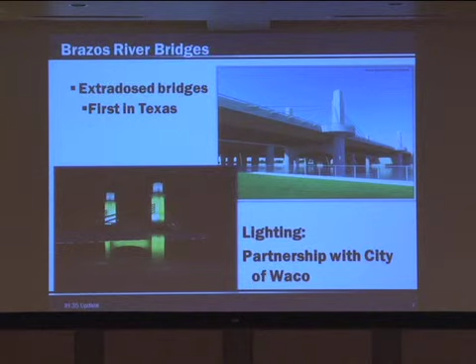And then also just some of the aesthetics that we wanted. This is the city of Waco, and Baylor really wanted a signature bridge in this area. So some of the aesthetic things, the lighting, is very unique also to accent this bridge.

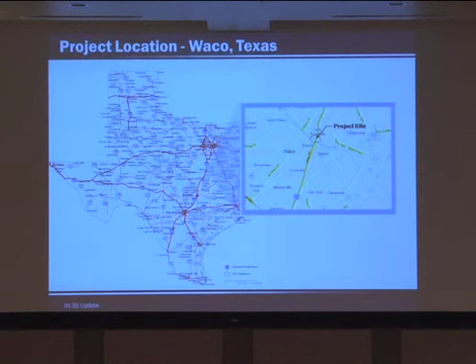But just like all of us, we have to start in a location. Our project site is right there, right over the Brazos River Bridge near downtown Waco. As you can see here, the location had discontinuous frontage roads, U-turns at the river, and so needed to connect those frontage roads. This location is very unique in that it's a very busy river area.

As you can see in the picture on the right, the new McLane Stadium is starting construction. That was in our northeast corner. On the northwest corner we have the Oncor substation and a restaurant, Buzzard Billy's.

The southwest corner has Baylor Robinson Tower, with a lot of pedestrian traffic, students coming back and forth there. On the southeast corner we have the Texas Ranger Museum, an active Texas Ranger outfit, and a visitor center.

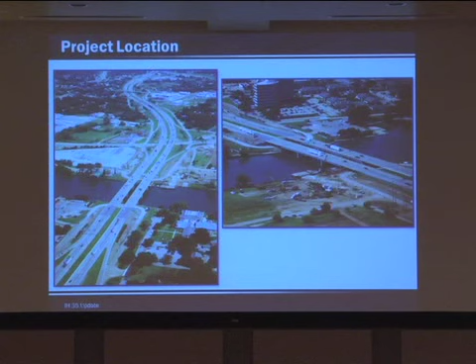Just like in our careers, it takes a lot of communication and people working together to implement projects well. There was a lot of coordination between us to get this done. Just like all of us, we need to have things that have come before us and things that come after us.

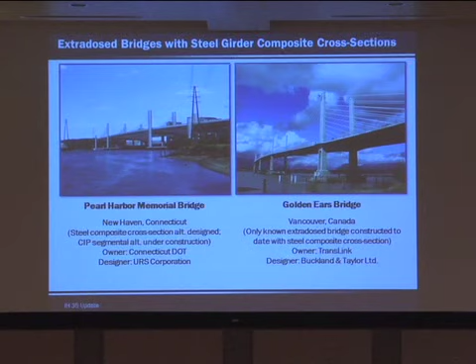A similar steel girder composite extradosed bridge was built recently in Vancouver, Canada, the Golden Ears Bridge. The Pearl Harbor Memorial Bridge in New Haven, Connecticut is currently under construction.

An extradosed bridge is basically a combination bridge, a combination between a girder bridge and a suspension or cable-stayed bridge. A girder bridge is what we're most familiar with - the girders span the river or roadway we're crossing and support all the load. In a suspension bridge, the cables basically bear the vertical load. An extradosed bridge has both the cables and girders carrying the load - the load is shared, and the stays act more like pulling the girder together and strengthening those girders.

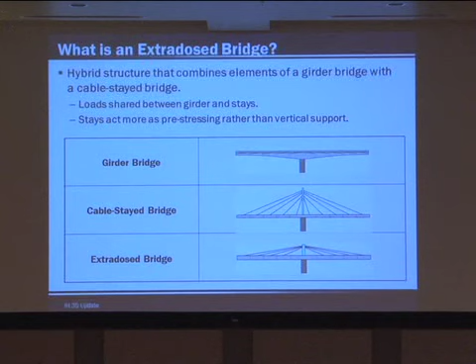This bridge was chosen as a signature bridge for Waco, and the reason they chose this aesthetic is that there's a suspension bridge, actually a pedestrian bridge that used to be a vehicular bridge, in Waco. So in order to cooperate with the community, Bridge Division and AECOM came up with the idea of the extradosed design to give that cabled look, but because of the width of the river being shorter, not a big span, we couldn't do a true suspension bridge.

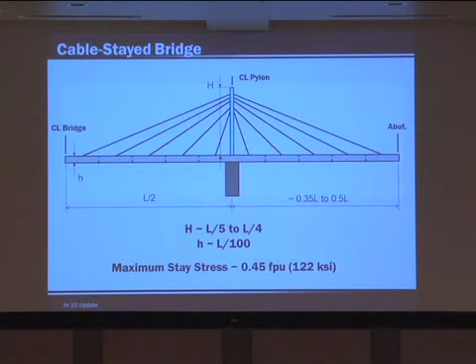You see here a true cable-stay bridge and suspension bridge have a very high pylon in comparison to the length of the bridge, and the girders are very shallow in comparison to the length of the bridge. As opposed to the extradosed bridge, which has a much shorter pylon and a much deeper girder to carry the load.

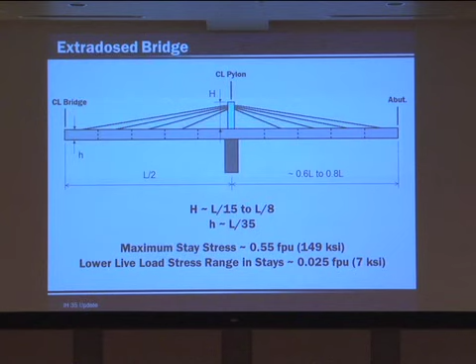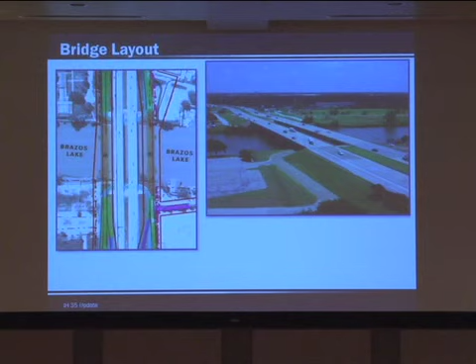This bridge is 56.5 feet wide. It was northbound and southbound frontage road bridges, 56.5 feet wide, 620 feet long. From pylon to pylon is 250 feet, and then from the abutment to the pylons it's about 3/4 of that length, 185 feet.

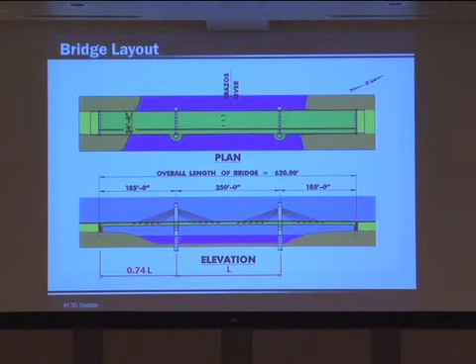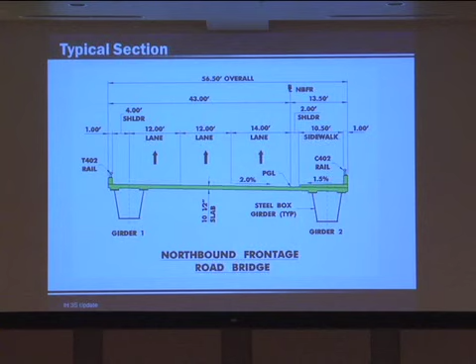Just like our careers, we all need a good foundation, and so the first step in building this bridge was our drill shafts. These are actually there in the river - you can see the pictures of them drilling the river with their rebar cages ready to go. These are 10-foot diameter drill shafts to support the bridge.

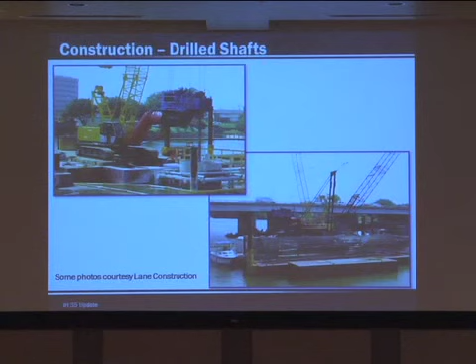After we got our drill shafts - this is actually where I came onto the project timeline-wise. The previous project manager, Jacob Bell, did a great job getting this project going and started, then took another job, and I came on about the time the footings were being done. These footings are basically right below the water level and transfer the load from our 9x9 pylons to our 10-foot drill shafts. This was actually my first time doing a bridge in the water.

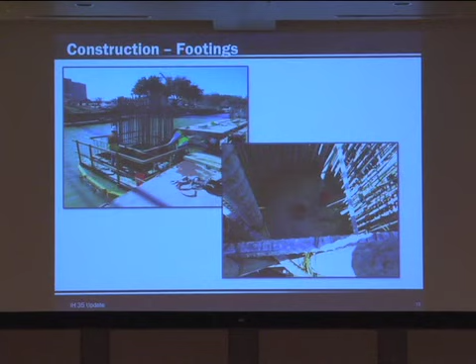I came on right as they were doing this - we had our form set in the water. Unfortunately we had a bit of a leaking problem, so coordinating with the contractor, we came up with some methods to pour this underwater, even though it was supposed to be a dry pour. We got with Bridge Division, an invaluable resource, to see how we could do that, along with ideas from the contractor.

We forced the water away, starting in one corner and pushing it into pumps away from the concrete. And just like in life, a lot of times we're faced with some difficulties. Things don't always go exactly as we had planned.

So the first footing pour, I'm out there with a brand new engineer, and we're going through some learning curve as a contractor. It's important in our careers to have a higher power you can rely on. I remember being out there on the footing pour, watching to make sure the water didn't mix too much with the concrete. It started getting to where I was questioning it, and I really prayed there would be a clear sign whether or not to cut off the pour.

And actually, our pumps went down completely and the water mixed in, so it became very clear. But we learned a lot of lessons, and I think in life and in our careers, when something goes wrong, we learn from those mistakes.

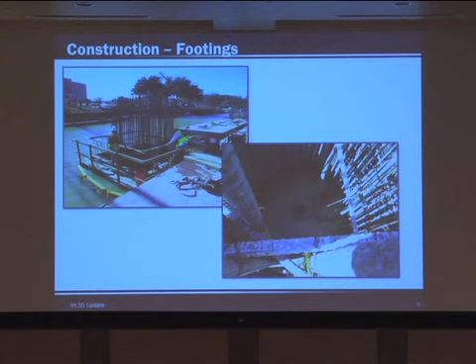The contractor did a great job coming up with different ideas. They brought in different pumps and buckets with holes put in the bottom to prevent things from getting up into the tube. They also got divers out there to seal it better. We still had to deal with the water, but had success pouring those footings, and as each footing came we got better and better, eventually doing some with very little or no water coming in.

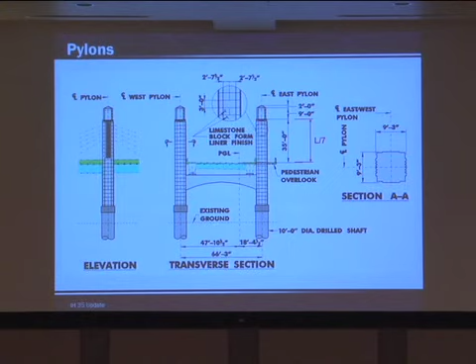After we got through with our foundation, the pylons were the next step. You see here the 9x9 shape with the aesthetic features on the right side. These pylons are about 1/7 of the length of the bridge, or of the cables.

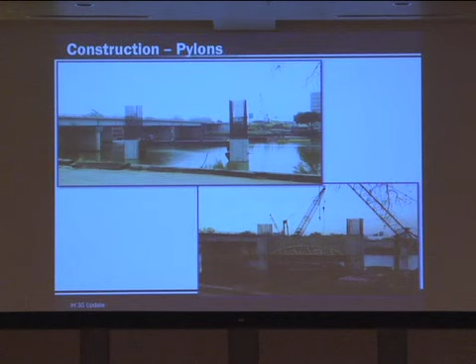Here's just a couple pictures of the pylons being constructed. Obviously this construction is much easier once you get out of the water — it's pretty simple, you get your forms and everything, it's a lot more straightforward. Just the abutment there being built more on the pylons.

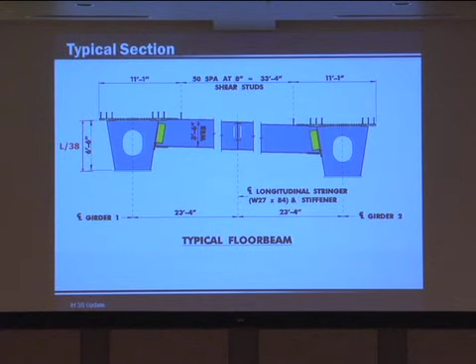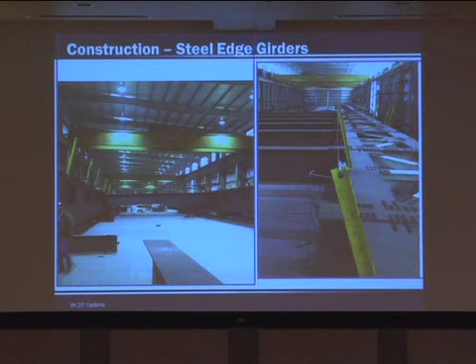After that came the girders and the floor beams. This is our typical section for our girders, with the depth of the girder here about 1/38 of the length. Here's pictures of them being fabricated at Hirschfeld Industries, and another picture of that.

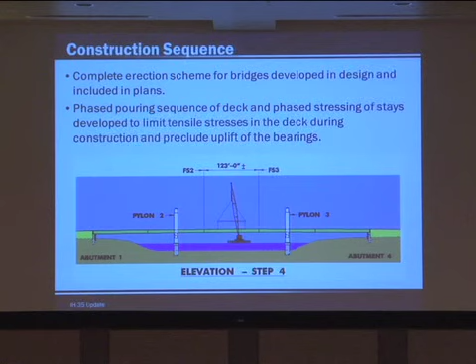Just like in our careers, another lesson we all need to know is that we have to have a plan — planned in this case from abutment 1 to abutment 4. AECOM did a great job detailing that out in the plans, and Lane did a great job taking that, putting it together how they wanted, and submitting it back to AECOM. Basically, we have shoring towers set from the abutment to the shoring tower, from the shoring tower to the pylon, and then coming from the other way and setting it in the middle.

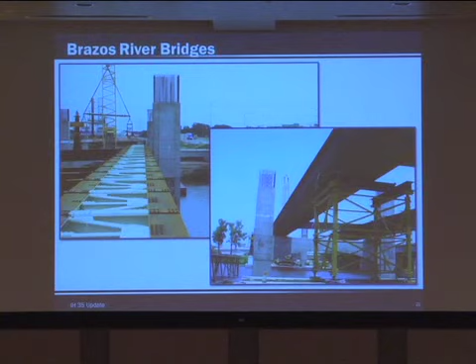So you can see here, setting the girders on our shoring towers. Another great lesson: we had to meet in the middle. We set the last piece there in the middle and had to make sure it all fit together well.

Set that in there, and then the next step is the actual stays. The anchors are connected to the girder on one end, and then we have a saddle that they go through to provide that additional support. You see some of the loading there on the anchor system.

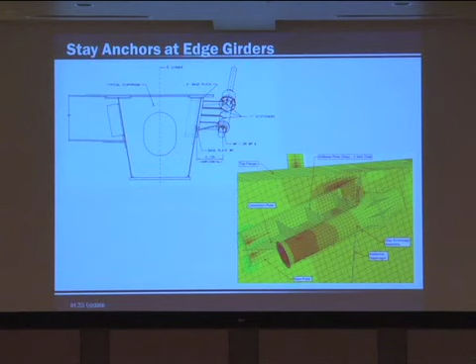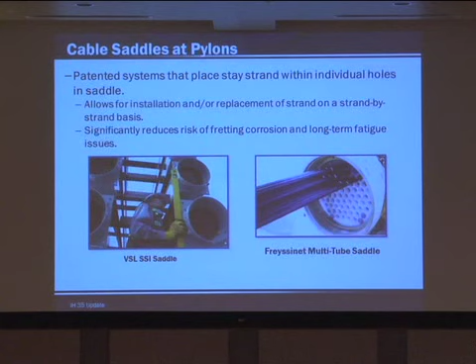There's what the anchors look like — they were connected, bolted onto the girders. Then the saddles were formed in the pylons. This was actually a patented system where each of the strands could be individually installed or replaced, which helped reduce corrosion and fatigue, and also allows for future maintenance by replacing strands if necessary. Here are our saddles, produced by Freyssinet.

These saddles were actually set on the ground in the rebar cages, staged there, and then lifted on top of the pylons. You can see over there on the left one of the rebar cages with the saddles in it.

It was very important that we got those saddles at the very exact directions, both in the X, Y, and Z, rotationally, because those cables had to pull a very particular way. So there was coordination between Freyssinet and Lane as they did the deck pours and everything.

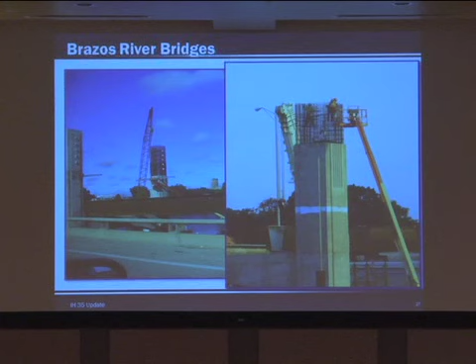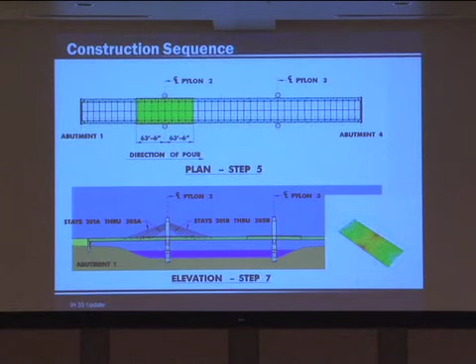Here's the form up there ready to pour on the saddles. And then we had a very particular construction sequence. In order to stress the cables and pour the deck at the same time, it was a very particular process. We poured first at the pylons, stressed cables, continued to pour, stressed cables again, finished our pour and stressed the cables, then tested those cables and came back and restressed a couple of them to make sure they met the models.

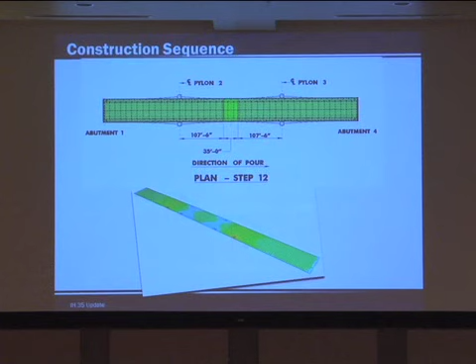You see here the pictures of the deck pours there at the pylons. Then our stay cables—there was a single plane of 5 cables at each pylon, and all those stays consisted of 12, 0.62-inch diameter strands to support that.

Another lesson learned: if you think of yourself as the girder, you're going to need people around you that are going to support you, that are going to help you through your career. I've been fortunate enough to get a lot of that help and guidance and support.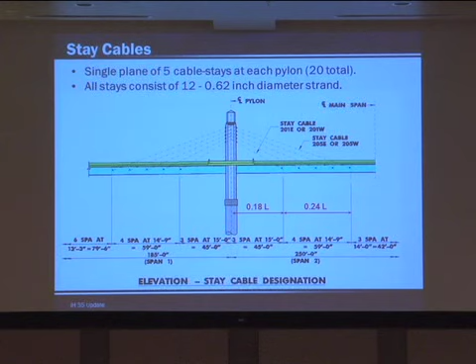From the pylon to the first set of cables there is about 0.18 of the length of the bridge. And the total distance between the first and the last stay cable is 1/4 of the length of the bridge. You can see here the cable stays being constructed.

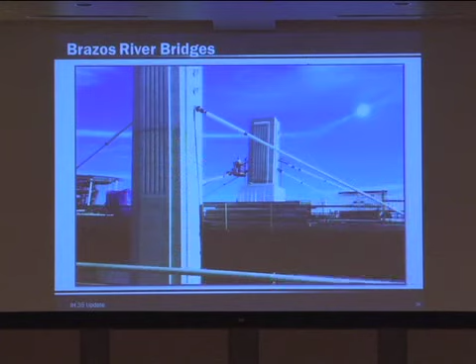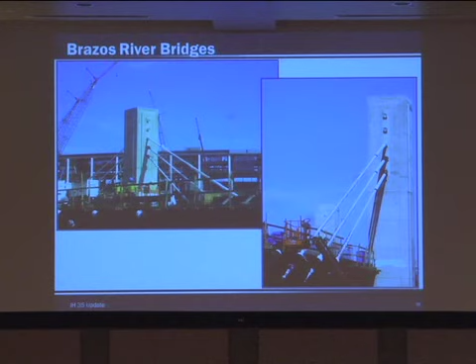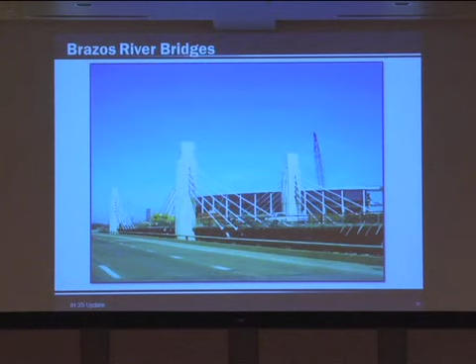They just kept going, continuing to do those, in a very particular process, stressing them. They installed them all, then were stressing and pouring, putting them on and getting them placed. They're not all totally straight in line—there's a bit of a fan due to the way they had to attach to the anchors there.

Right now, where we're at, we have it totally open for traffic. We still have some lighting and some aesthetic things left to do.

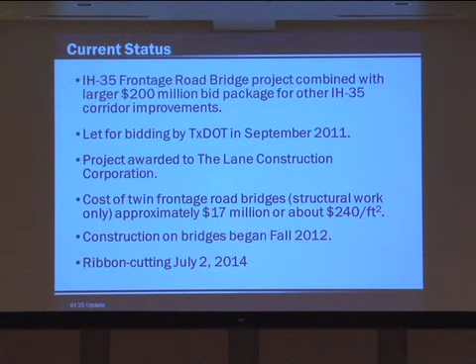This bridge was actually part of a larger contract that we let in September of 2011, and construction on the bridge began in fall of 2012. We opened the bridge 2 months earlier than anticipated—we had some incentives in there. We change-ordered those incentives because of McLane Stadium coming and when their first game was going to be. So in order to make that happen, we added that, and Lane, our contractor, did a great job of meeting those deadlines and getting that roadway opened in time for that first game.

Here you can see in the background, McLane Stadium, and a picture of the bridge and the stadium together there on game day, fully open for traffic. You can see we're still working on some of the sidewalks below, and we still have our lighting to go.

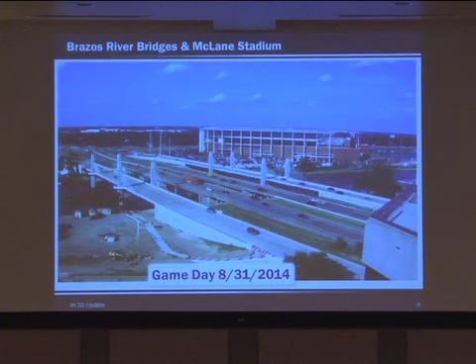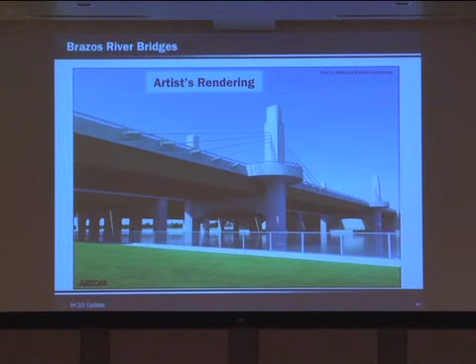In our careers, I think it's important that as we do projects, we think about where we were and where we wanted to be, and go back and check and see. Jody, our PIO from Waco, did a great job of putting this slide together showing what we intended it to look like, and then transitioning into what it turned out to be. It was a successful project where we got to where we were trying to go.

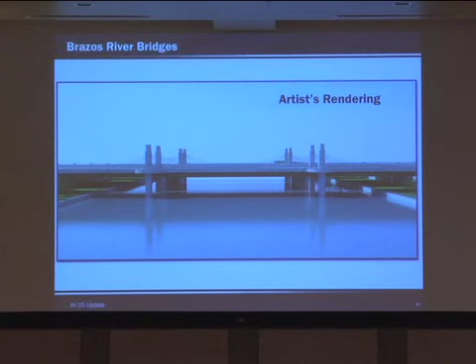A chance to look at that from a different angle. We put the stadium in the background on this one so that it wouldn't dwarf our bridge here. You can see, very similar to where we were trying to get.

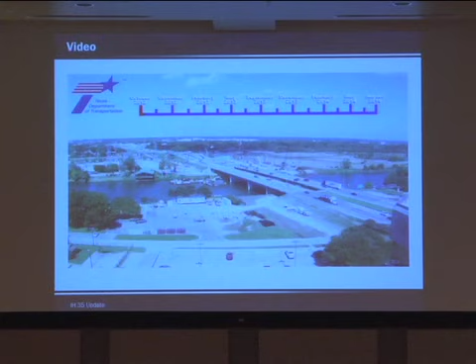And then it's nice to take a minute after a successful project and sit back and enjoy that project.

I have a time-lapse video here. Unfortunately, the embedded file in the PowerPoint wasn't working very well, so we'll watch it on this MP4 instead—it'll flow better. You can see there our pylons and our footings going in on both sides of the river, coming up, continuing with our pylons.

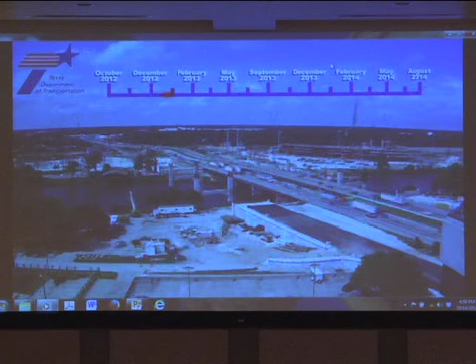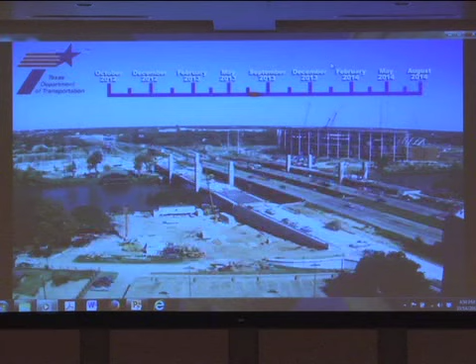We should be having our girders coming in here on the southbound side and now the northbound side. We've got our floor beams going in, construction going. And here we'll start deck pours over there on the northbound bridge, pouring at the pylons. The cables will start going in on the northbound bridge, pouring going on the southbound bridge at the pylons. The cables going in there, tensioning.

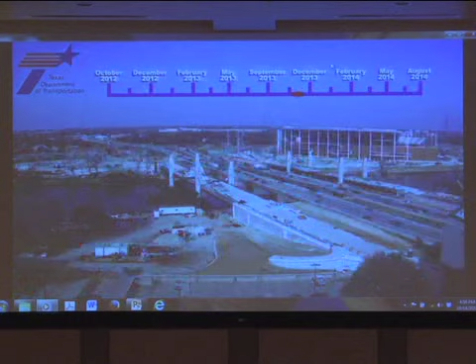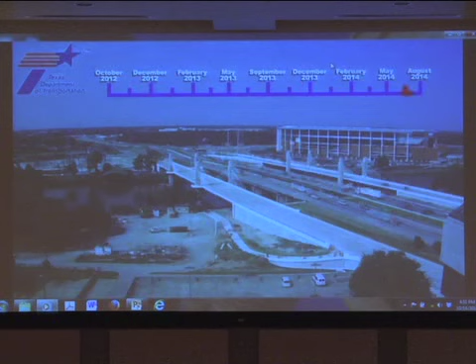Continuing the construction sequence to pour the rest of the deck. And you see here we open traffic. We have them push from side to side as we do some rail work and some sidewalk work. As the project progresses, we're moving them back and forth. But near the end of May, early June, we're starting to get it completely open. Traffic is flowing across there, ready for game day. So a successful project for the community to get that ready and in time.

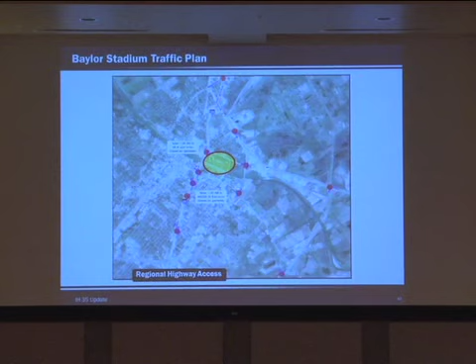Sometimes after you've had a chance to sit back and relax, you need to evaluate how well it worked. So, in coordination with the City of Waco and Baylor, plans were put together on how to handle not only the vehicular traffic but the pedestrian traffic coming to the stadium site. Plans were put together on what we had available for coming there. You can see our main routes coming in: I-35, Business 77 or LaSalle, and Highway 6.

We actually had a project right in front of the stadium, which we converted MLK into Loop 574 to provide additional access there in front of the stadium. Lane Construction also did that and got it done in time for the stadium to be open.

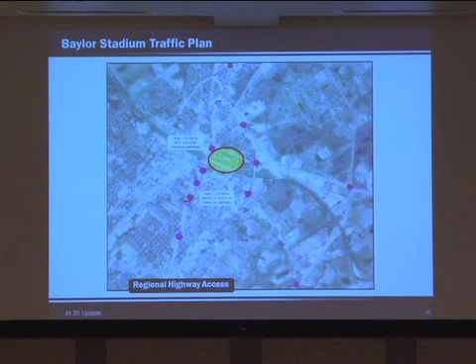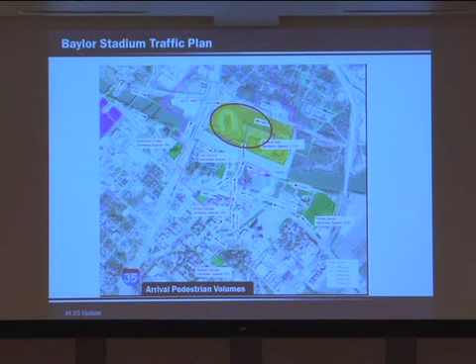You see here very high volumes anticipated for the pedestrians. Working with Baylor through this whole project, we had coordination meetings between ourselves and Baylor on the stadium, on when we were going to have lanes closed, when they needed to get in and out, and everything worked out well. But there was just a large volume of pedestrian traffic coming and leaving the stadium, and planning for that. Our traffic volumes, I know they're hard to see here, but there were large traffic volumes coming in on each of the different routes.

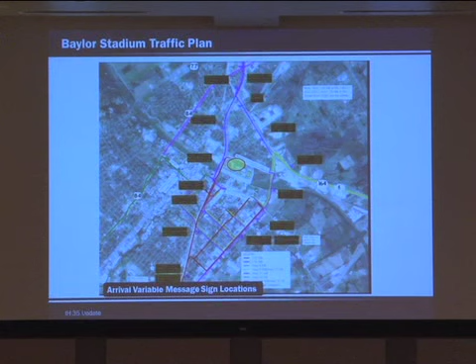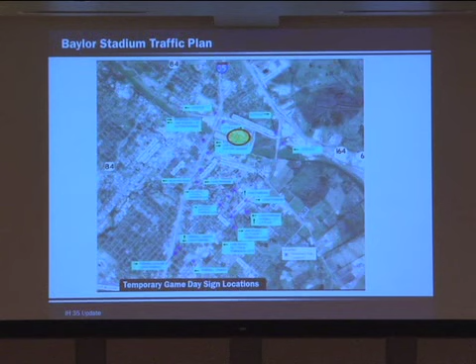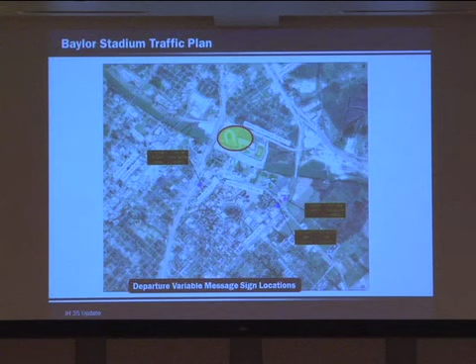Then there's getting messages out to the public on game day: where to go, where to park, what's closed, how to get to different places, making sure that information flowed well using our variable message signs. And sign locations, temporary sign locations that described where all the parking was, making sure our facility built in conjunction with our other routes would work well. And then just traffic leaving the stadium, and departure, giving people information on how to get out, what's closed, what's open, coordinating that.

I think it's also important to take a chance to say thank you to those who really helped make the project a success. First, I have to thank AECOM and Jody Wheatley for their assistance on this PowerPoint slide. I borrowed, with permission, a lot of the technical things from AECOM's presentation to the Steel Council on this bridge, and Jody put together pictures and other things for me to pull it all together.

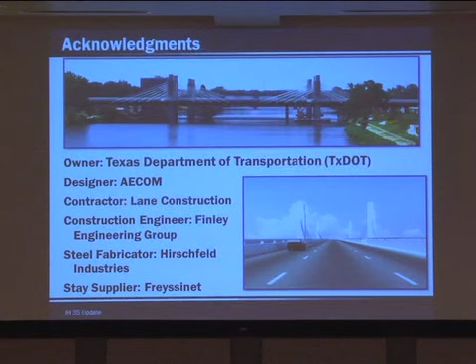TxDOT, working with the City of Waco and Baylor, to provide a bridge that the community wanted. The designer, AECOM, who we had on construction services to help us through the process as problems came up, to redesign things and look at those. The contractor, Lane Construction, who did a great job getting this bridge built on time. Finley Engineering Group, working with Hirschfeld and Freyssinet on our cables and girders and getting that all coordinated.

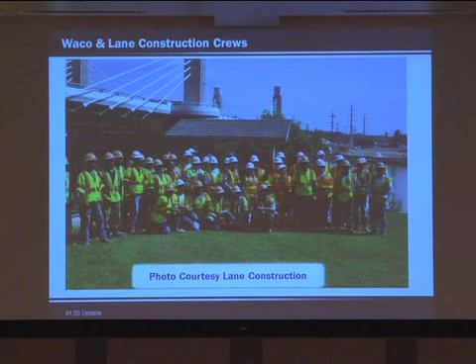Really, the real thanks goes out to the people who built the bridge: the workers from Lane Construction, our inspectors, the staff for Lane and for TxDOT involved in this project. Special thanks really go out, from me, to the inspectors we had out there who made sure this bridge got built the way it was supposed to be. Out of the area office—and we actually had two area offices participating, as Hillsborough loaned us an inspector due to workload—Lawrence Wilson out of the Waco area office and Guy Wardlow out of the Hillsborough area office. And then the invaluable resource from our Bridge Division, Inspector Stan Ybarra, who came down and inspected all of our steel structures. Just a great asset and a great, knowledgeable person.